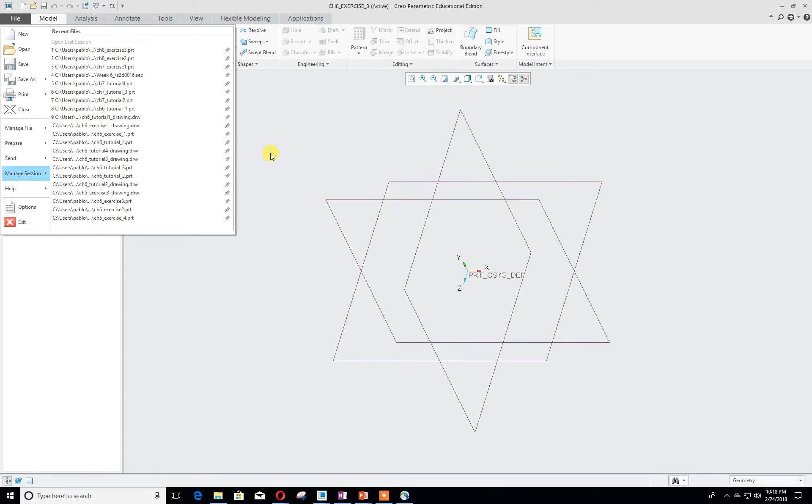Okay, don't forget to always choose your directory so everything could be organized and well done. Let's start drawing the model. We're going to click on sketch, and before I continue on, we're going to start with the base, with this base plate. So we're going to draw this base.

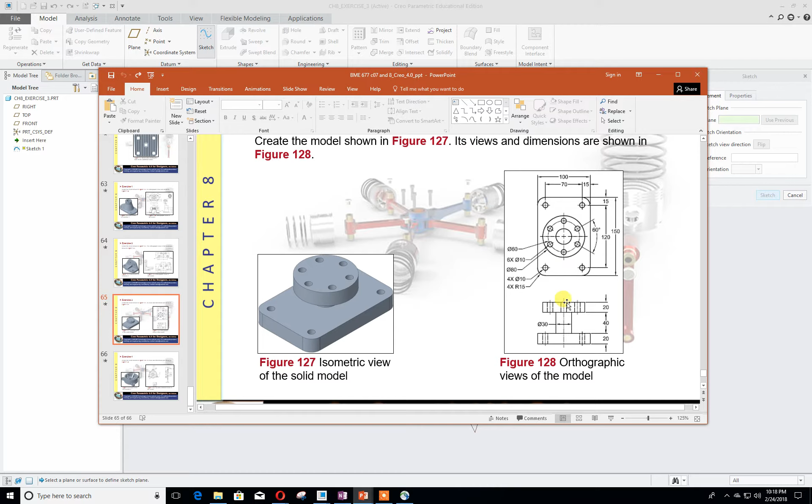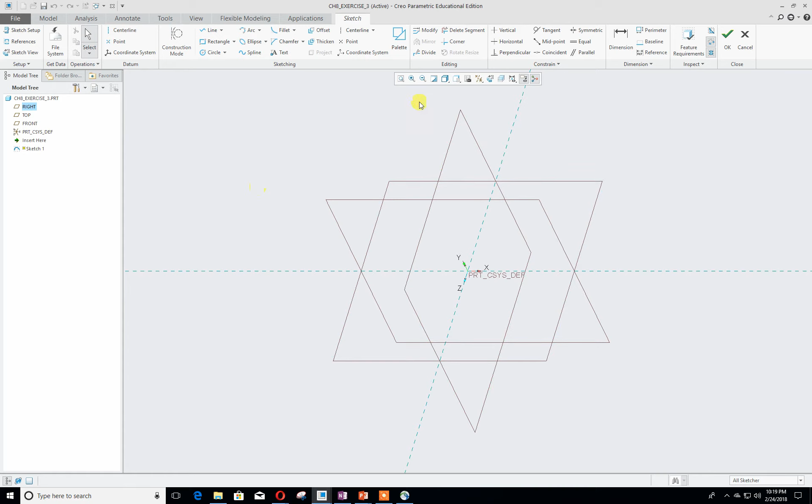I'm going to choose top and make sure the arrow is looking down. Doesn't really matter, but later when you click on orientation, that will matter. Click on sketch, sketch view, and I would draw center lines. It's going to help with this portion of the drawing. So we're going to draw a rectangle.

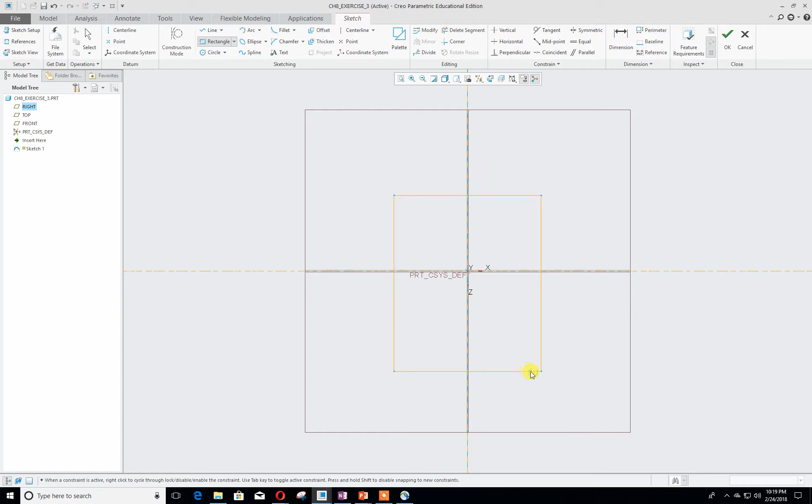And make it locked as such so it could be symmetric. This is going to be a symmetric rectangle. The total width will be 100, and the total height will be 150.

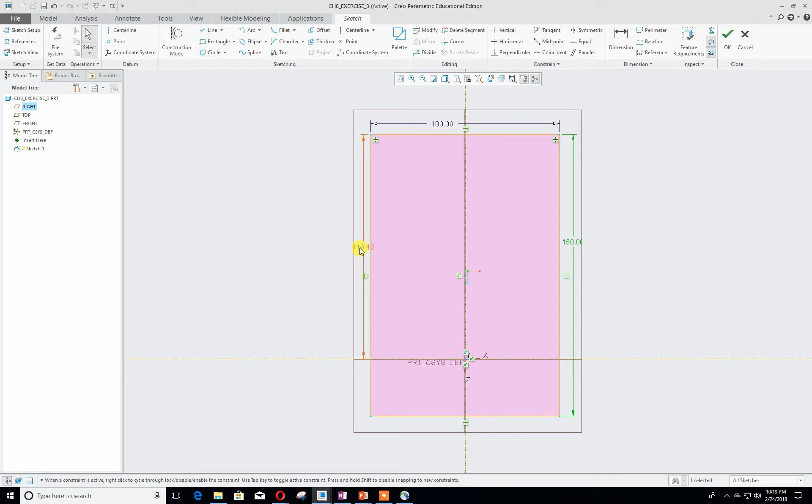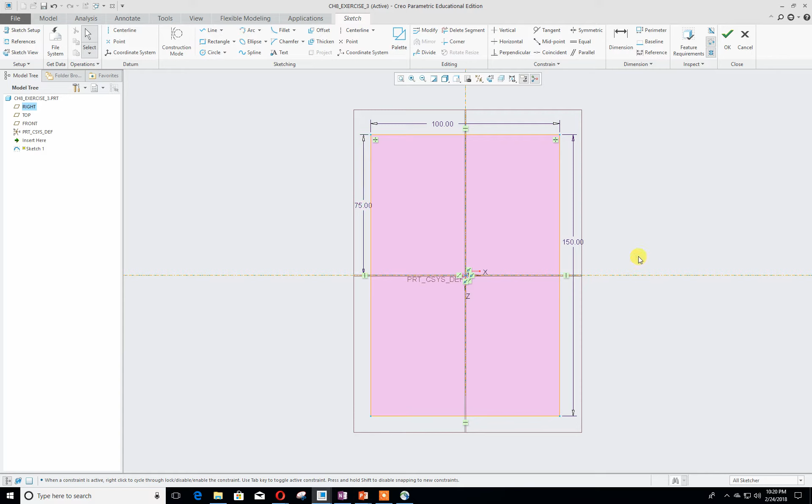Make this distance 150 divided by 2. We always want our rectangle to be as centered as possible and everything well organized, because this will later help us in making the holes for this specific object. Once we did that, we did our basic rectangle. Now we're going to focus on doing the holes.

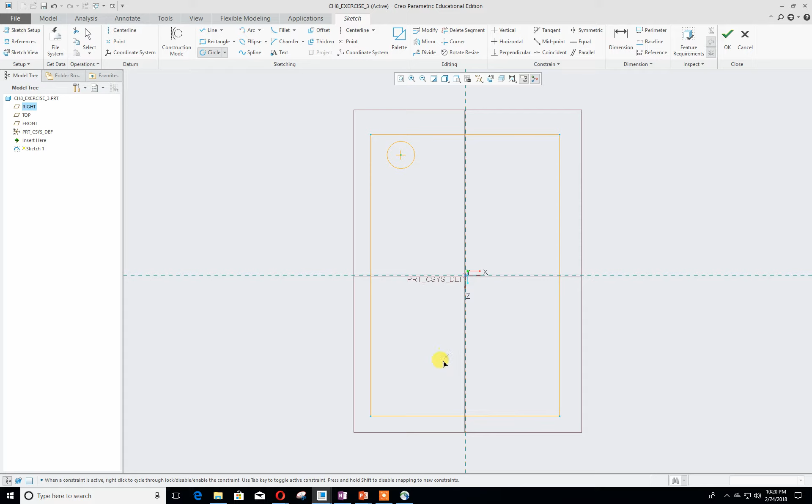Instead of extruding this object and then drawing holes, let's make it all in one shot. So what I would do is draw any circle, doesn't matter where, and I'm going to draw another circle here and make it equal to that circle. When you see this circle become green, or you see that constraint, this basically means both of these circles are going to be the same.

So now we're going to click on symmetry. We're going to click on the center of the circle, and we're going to click the center line. This is why I created the center line, because without it, you cannot use this constraint. For some reason, you need to literally put a center line.

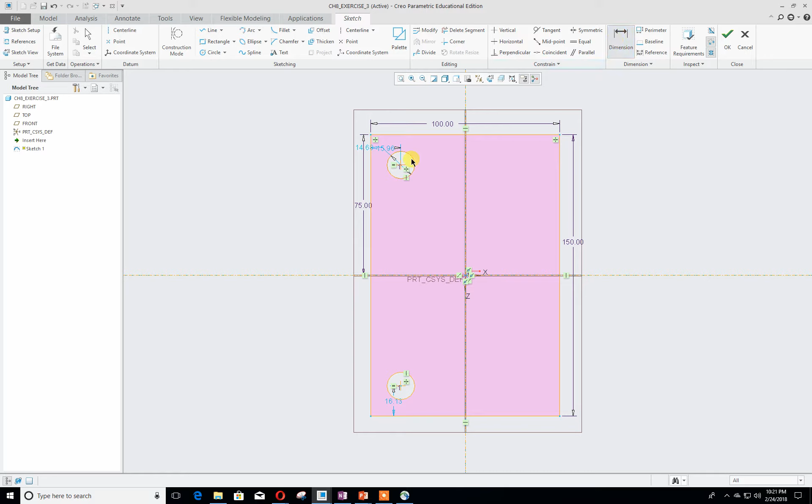So we're going to click on dimension, click on both of these centers, and both of these centers of these circles has to be 120. I'm going to click escape and move this dimension to the side. Really doesn't matter, but I'll do it just to keep everything organized.

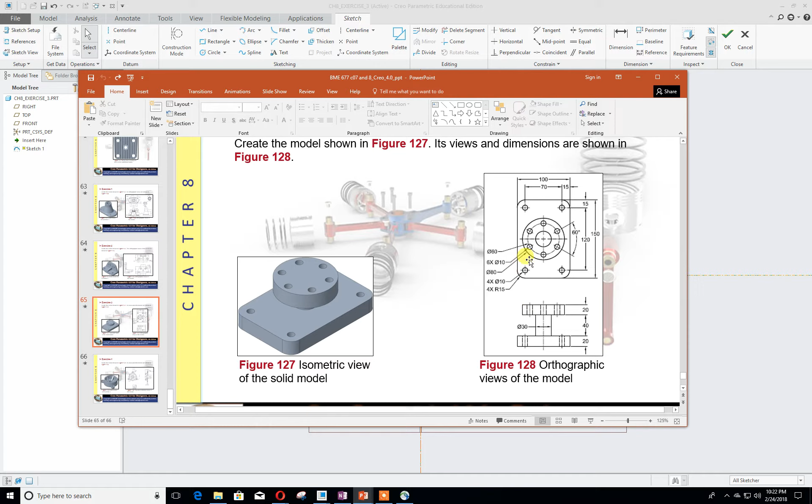So we already did this portion of these circles. I haven't applied the actual diameter yet, but I'll do that later. So now we made these two circles, which is 120. Now I'm going to draw this circle, and make the dimension, the diameter equal to that circle.

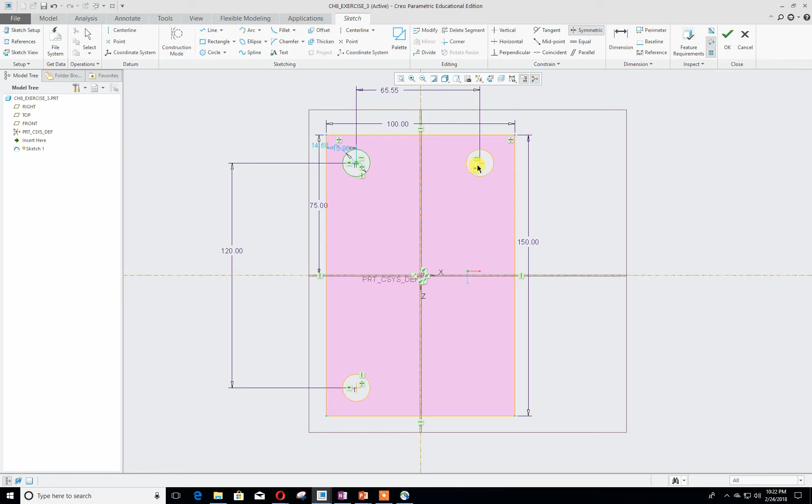I'm going to click on both of these. Actually, let me write symmetric, these two centers in perspective of this center line. And I'm going to write that this is 70, or has to be 70.

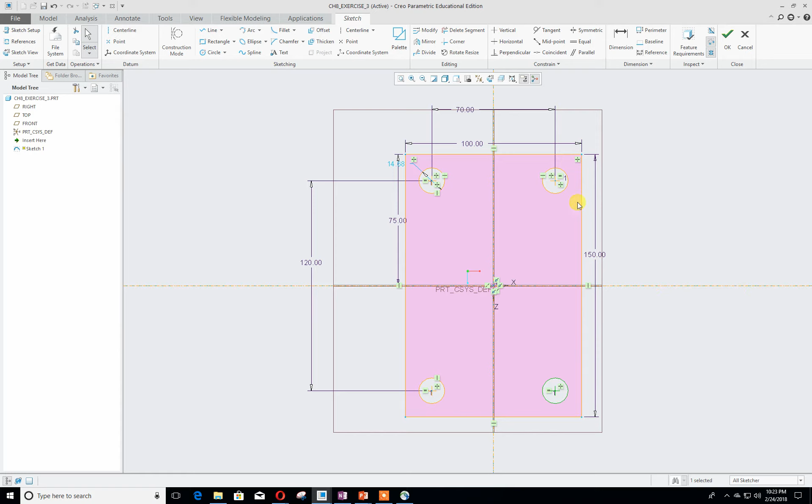Now all the circles are aligned, and our square is aligned as well. So now what we're going to do is click on this circle, click on mirror, and mirror from this center, and there we have all our circles. These circles have a diameter of 10.

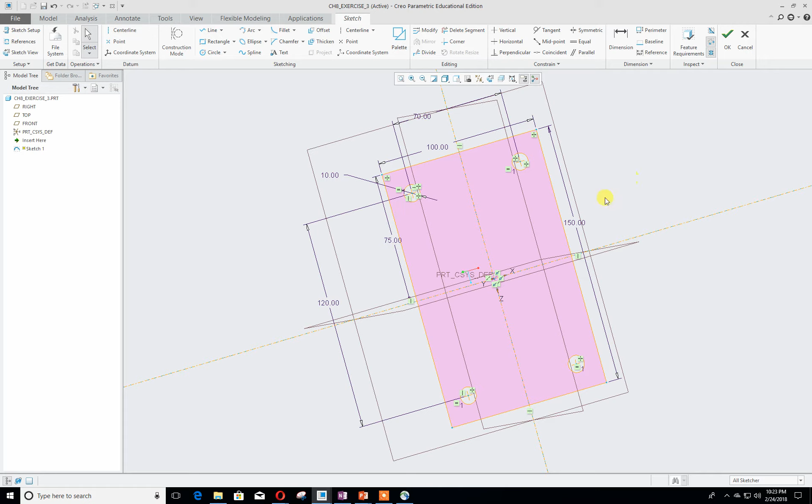As you can see, our shape is fully shaded, which means it's fully closed. So when we click on extrude, we'll be able to do this extrude with no issues. Let's click on sketch view, make sure everything is aligned. Everything looks good, and we're going to click OK.

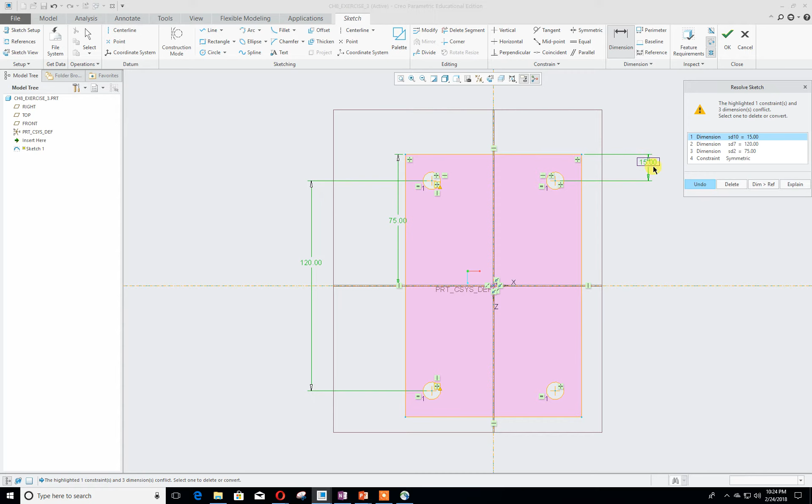Let me make sure of something. We're going to click on dimension just to make sure that center from this line is supposed to be 15, and it is, it's 15. Undo. And from this center, from this line, is 15 as well, which everything works out well. We're going to click here, OK. Hopefully so far you guys are with me.

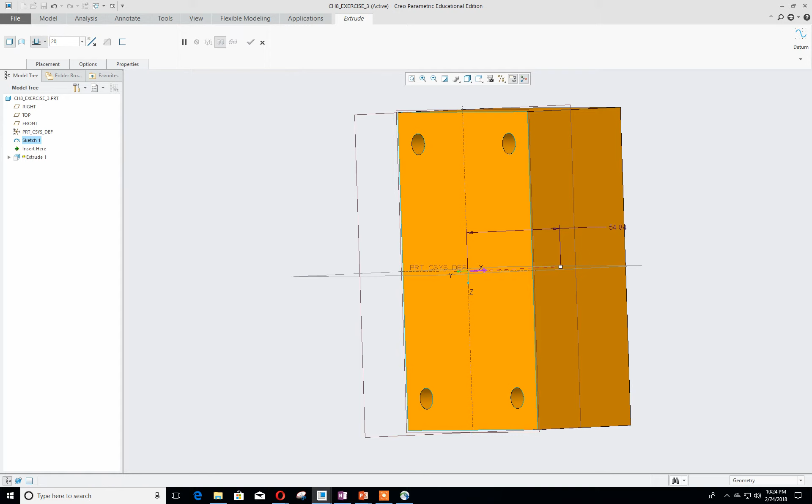Now what we're going to do is extrude, and I like to extrude from top to bottom, with a thickness of 20. Let's look at a standard orientation. So far we got our base plate.

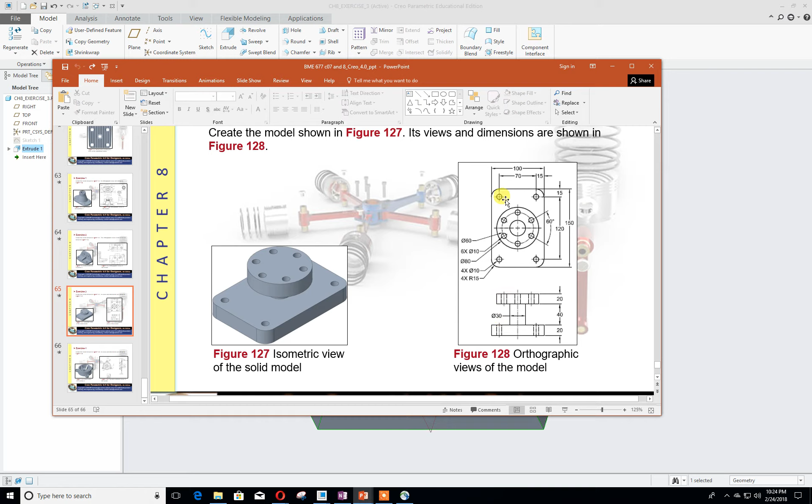This is our base plate. Now we're going to draw this cylinder that is right in the center, and we're going to extrude that cylinder upwards 40 units. So we're going to click on sketch, click on the top face, and we want our arrow to look down, so we could have a downward view of this object.

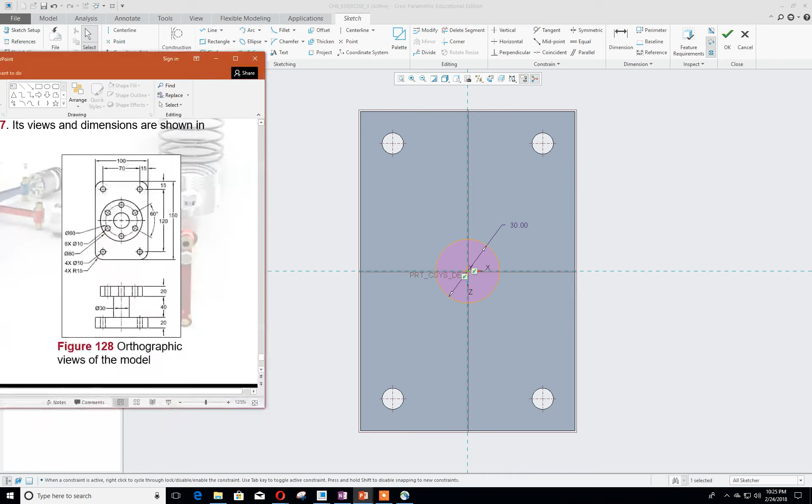As we click sketch view, this is top view. So now we're going to draw a circle at the exact center of this rectangle, and this circle has to have a diameter of 30. That 30 came from this indication right here. That circle has a diameter of 30.

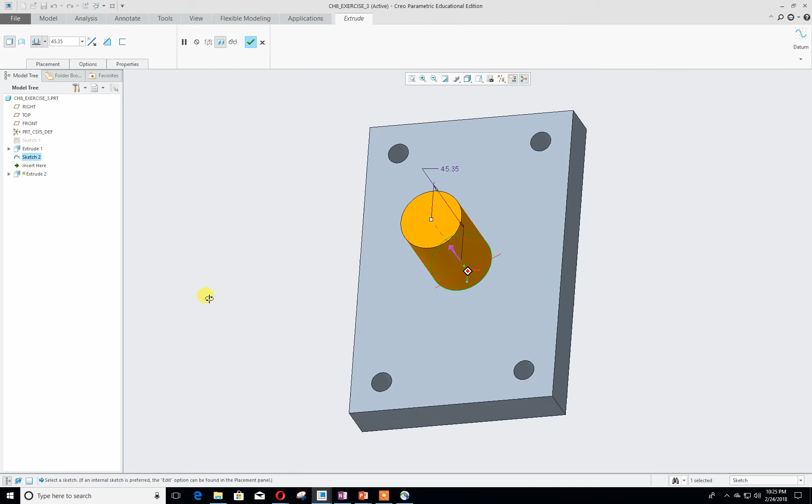And we're going to extrude that circle that we just drew 40 units upwards. So we did our second feature. We're going to extrude, twist it a little so you can see what's going on. You can either click here or here, and we're going to type in 40.

Okay, and we're going to accept. All right, so far so good. So we did our extrude, our base plate, and our second extrude, which was our cylinder.

Now we're going to click on sketch again. Just to digress a little, sometimes you might have selected an object and clicked on sketch and not really be on the place you want to be. Always make sure that you click outside before you click sketch, so that you don't automatically start a sketch view on a plane that you don't want to start drawing. Okay, just a disclaimer there. So always click outside of the object, click sketch view, so that you could choose your face.

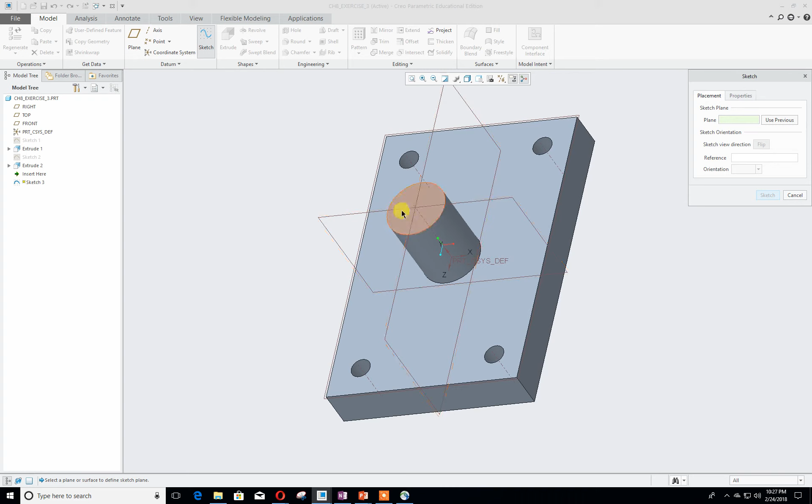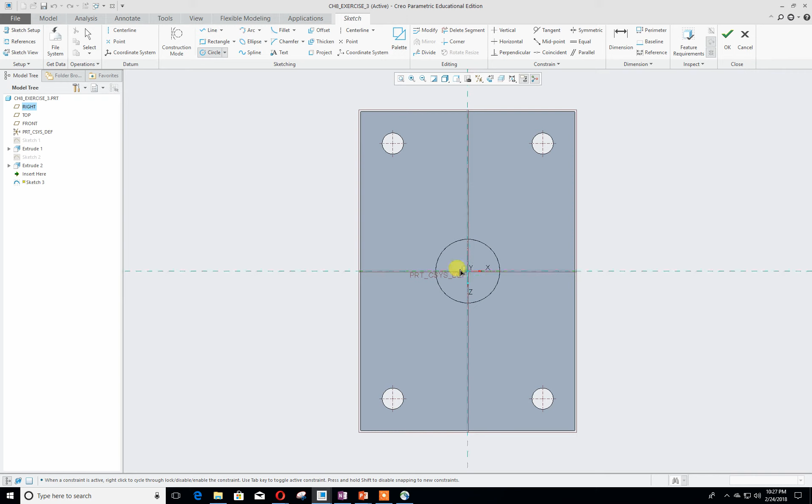And we're going to draw a sketch on top of the cylinder. Again, make sure that the arrow is looking down, so we could have a top downwards view, or a bird's eye view. We're going to click sketch, and we're going to click sketch view. So now we're going to make a circle, same center, and the big circle has a diameter of 80.

Okay, we have a diameter of 80, and that should be our first extrude. We're going to extrude that upwards by 20. Okay.

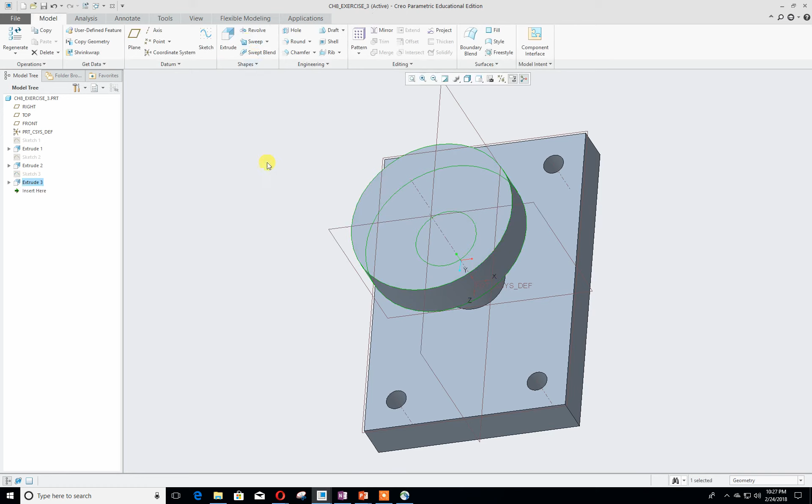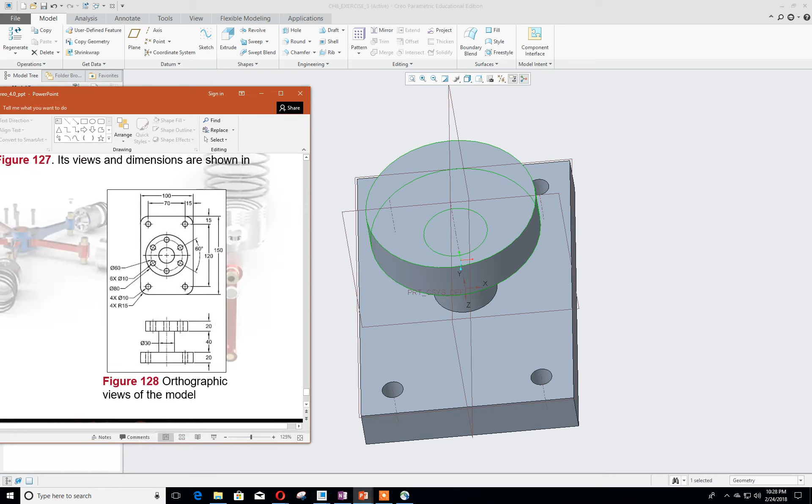Again, you could have gone ahead and drawn all the circles, but this chapter focuses on using the pattern feature. So I want you to practice using the pattern features and the hole features, so you could reinforce your knowledge using those specific tools. Okay, so in doing that extrude, which is this particular screw, now we're going to create the little holes in them.

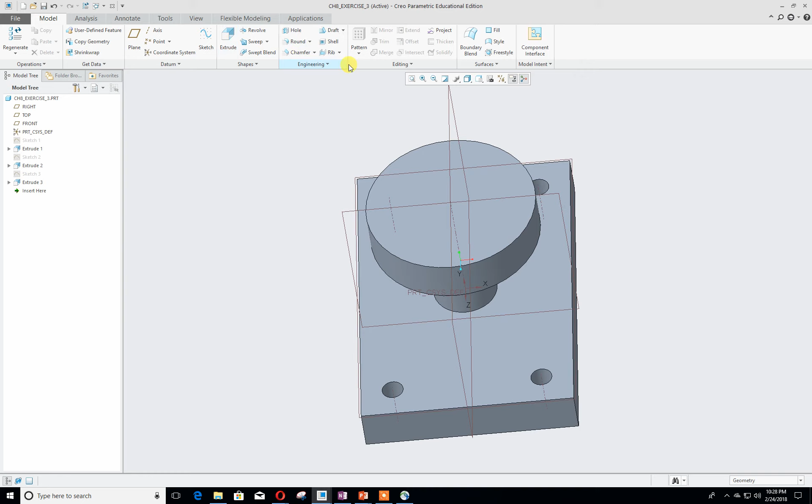Okay, and don't worry, we are going to create the round features, but I will leave that for last, because that's one of the simple steps. Let's just do the hard part now. So let's go right here, click on top, and let's click on hole. So we're gonna click on this surface, right?

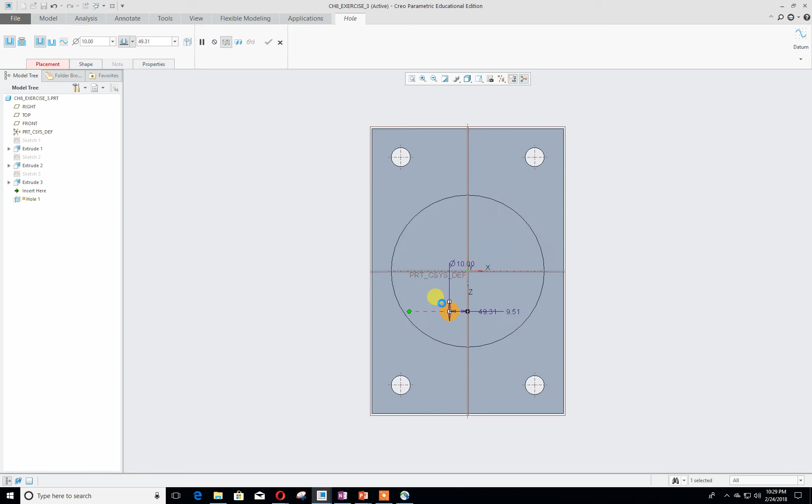You always have to reorientate these axes. It doesn't really matter, but you always have to attach them to a specific plane or edge, so it could have a coordinate system or a reference point, so the circle could have a hole. If you don't attach it, this will not occur. Okay.

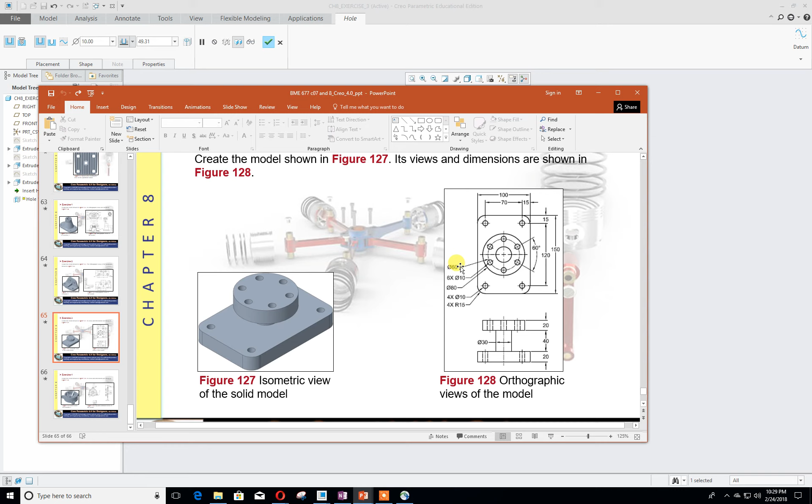So knowing that, we're gonna draw this circle right here. This circle is touching that center line, and it's gonna be outward by 30, half of 60. So it's gonna be a radius of 30. Okay, so from this point to this axis, oh, sorry about that, I'm just gonna make it 0, so the center is touching this axis right here, or this datum plane. Okay.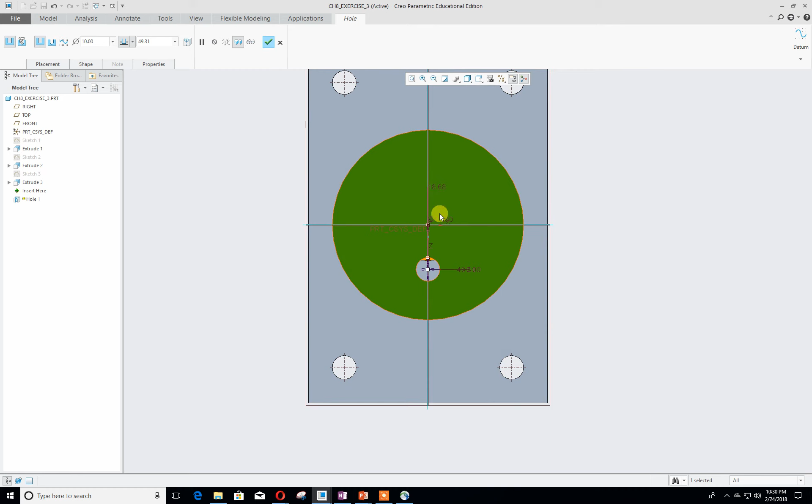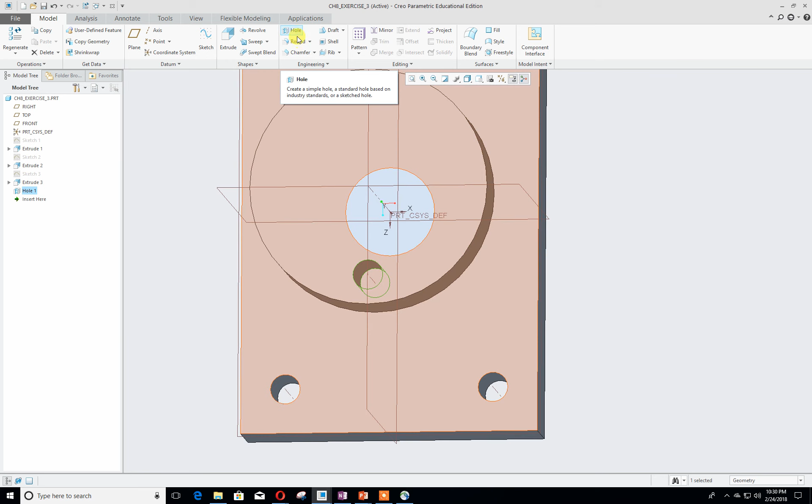Now from this axis it's going to be 30. Okay, and the diameter of this hole is 10, which was already placed, and we're gonna accept that hole feature. Now you might think, oh man, now I gotta create all these holes here. It's gonna take a lot of time. No, you don't.

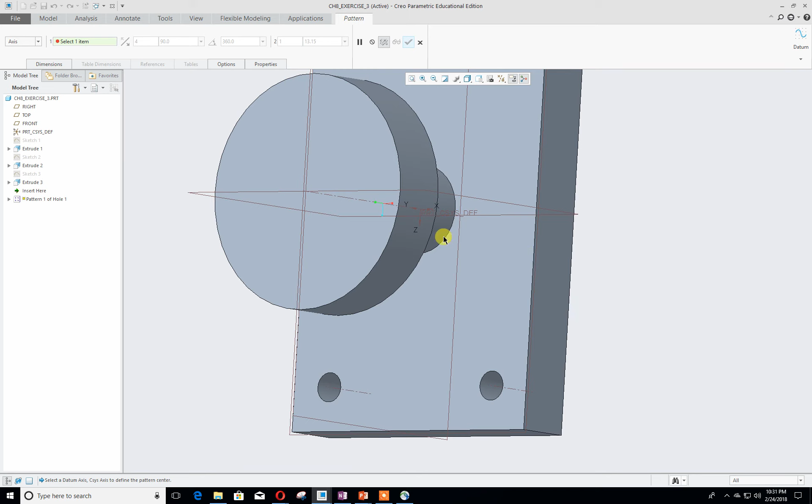All you have to do is go right here, click on the hole feature you just created, and click on pattern. When you're on pattern, make sure that you click here and click on axis, and click on that center axis of these two datum planes. Okay, once you did that, if you look closely at your diagram, it says that there are six of these. Okay,

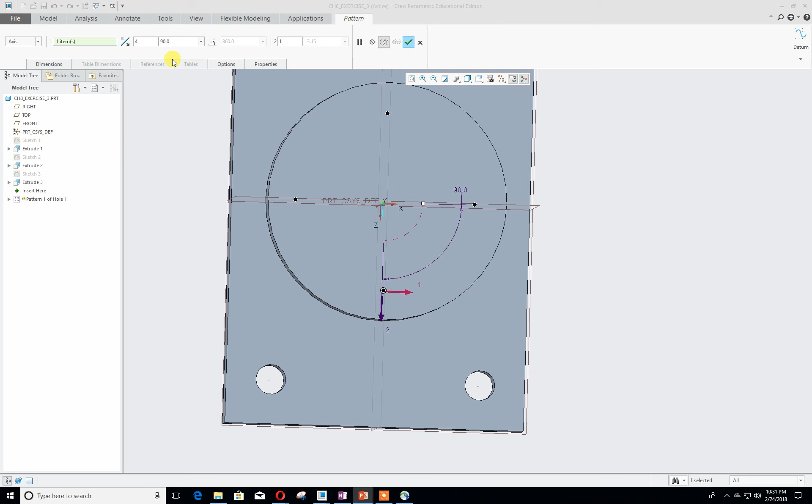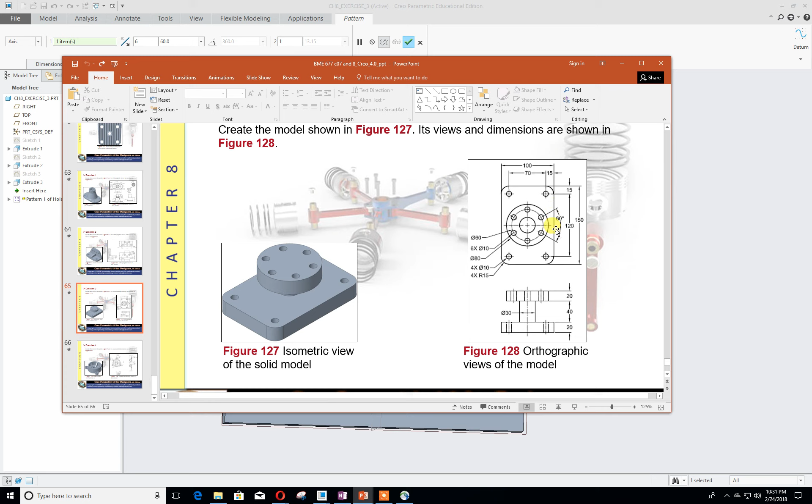so you're going to click on 6, and you're gonna write 60 degrees. So you're gonna write six patterns at 60 degrees. 60 degrees came from this drawing here that gave us the clue. Okay, and we're gonna go ahead and accept, and we did our holes right there. There we go, and we're almost done.

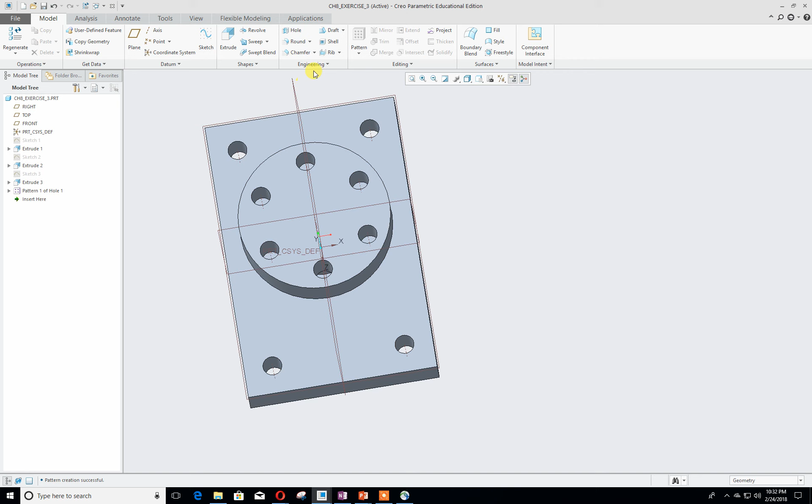All we have to do right now is create our round features. So we're gonna go here, click on round, and select all these edges. So click on this edge, rotate, hold Control first and click on this edge. Oh, something went wrong. Press Control Z to revert back and try again. Hold Control and click on the edge.

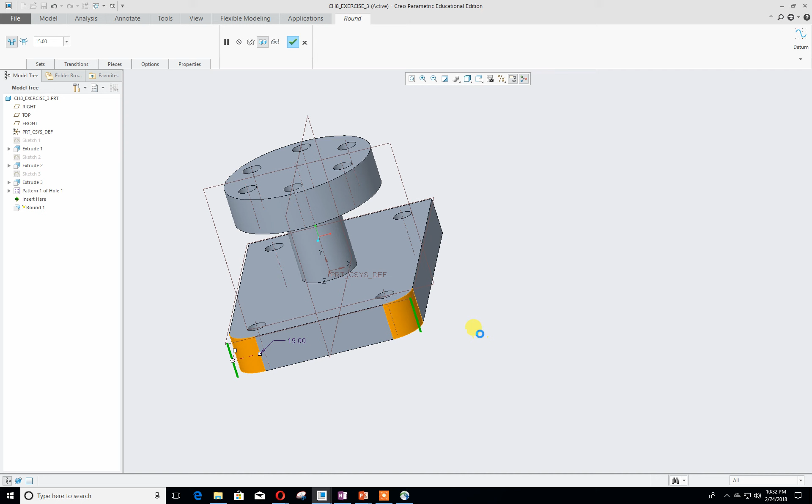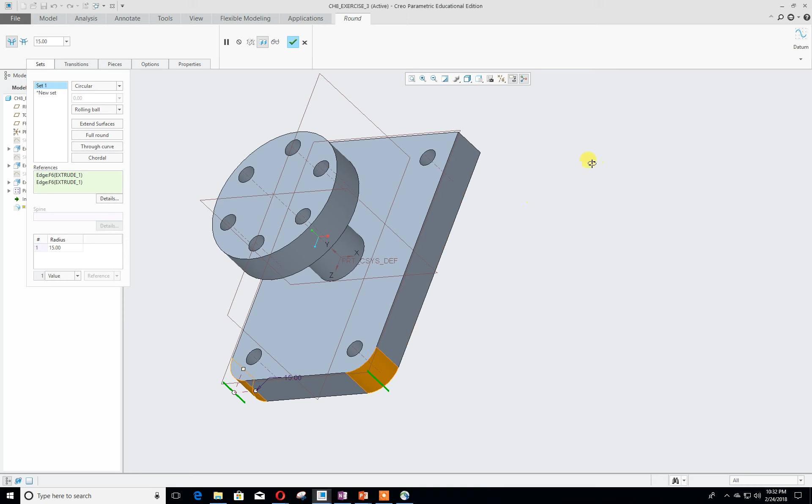Now sometimes you might click the middle button and it finishes, and you'll be like, oh wow, I made a mistake, now I gotta start all over or delete this round feature. You don't have to. If this has occurred to you, click round, click on edit definition, go to sets, and click on that set. Don't start all over, but from that point, just rotate again, hold Control and touch that edge. Okay.

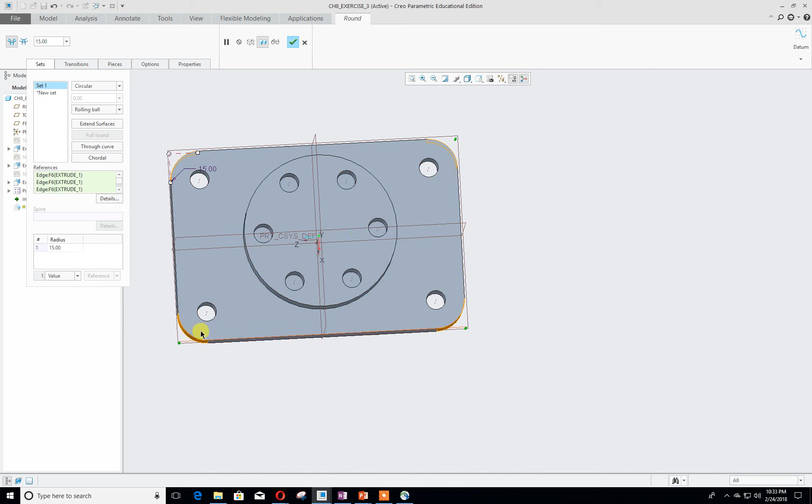I like to explain these little things because they do occur at times, and sometimes you tend to erase everything and try again. But it's also good to learn to go back where you started from. And the radius is 15, which is already here because I already did the model. But for you, type in 15, and all of your rounds will have 15. And click here, standard orientation, and we are done with our feature.

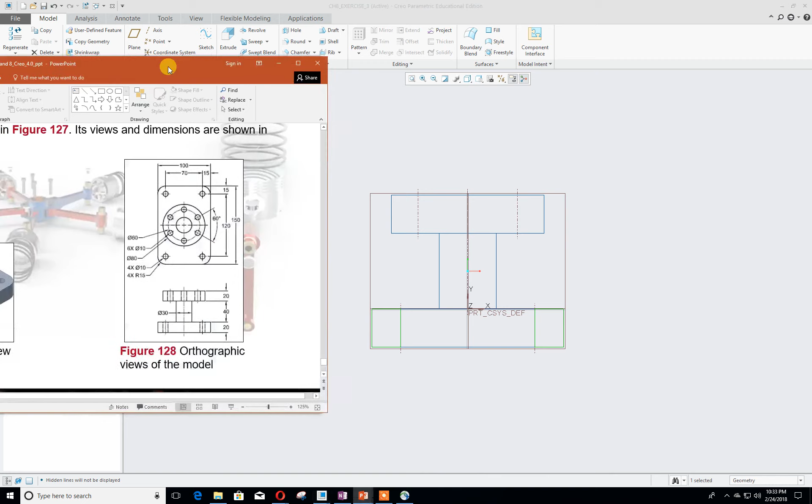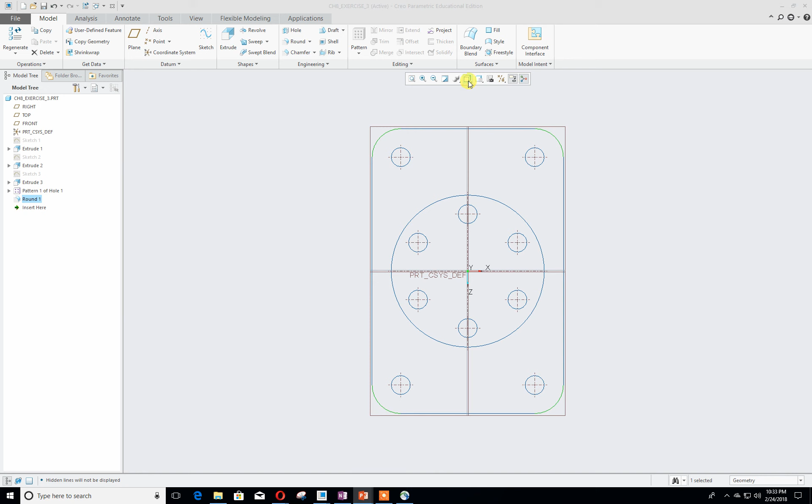I'm gonna select no hidden lines, and if we look at a front view, this is the bottom picture that we see. And if we look at the top view, oh, sorry about that, it's this portion right here of the model. Again, guys, I hope that this has helped you in sharpening your CAD skills.